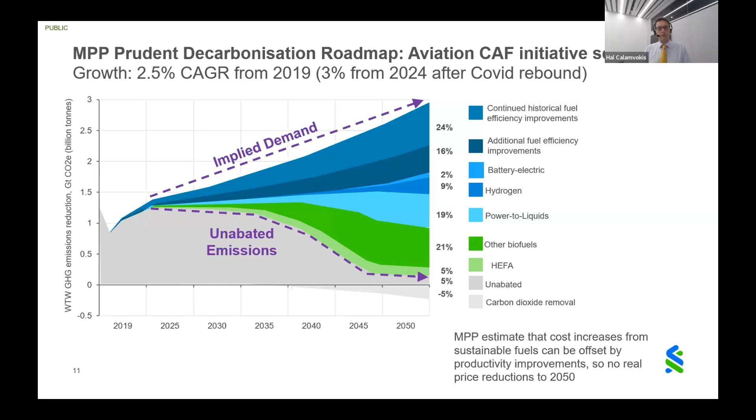And in terms of how this is used to come up with a metric for the Aviation Climate Aligned Finance Initiative, that very top line is implied demand, which is assuming an average of 3% growth from when we recover from COVID. This is lower than many publicly quoted numbers for the next 20 years, which are used in marketing. But bear in mind, this is in effect a constrained forecast. We are being constrained by the cost of and availability of carbon. And at the very bottom, you've got the unabated emissions, and you divide the two together to get an emissions intensity metric.

But just stepping back, I told you that was the roadmap selected by the Aviation CAF. There were actually 8 that were looked at in significant detail, and then 3 that were down-selected to, and I'll just talk through what the other 2 were. The red line here was a scenario for aviation from an organization called the One Earth Climate Model. And the blue line is the International Energy Agency, their net zero line, the NZE. These 2 are what are called integrated assessment models, in that they look at the entire global economy and all the segments of humankind's impact on the environment, and they apportion between them. Whereas the Mission Possible Partnership scenario is a bottom-up one. It's being built by the sector of what do we think we can do.

As you can see, they're very different. So within the One Earth Climate Model, they assume very strong growth this decade, and then a very fast switch over to sustainable aviation fuels. So emissions go up very quickly, and they go down very quickly. The IEA NZE assumes demand is effectively rationed to start with. Business travel and flights over 6 hours are restricted to 2019 levels. But that then means in later years, in the 2040s, a higher percentage of fossil fuels remain in the fuel mix. The areas under the curves are about the same. It's all about 20 gigatons of CO2 emitted.

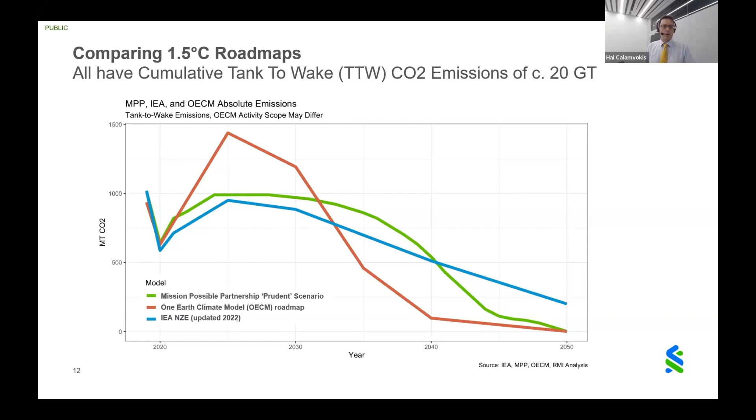And again, dependent on your business model, you might start closer or further away from the line. So when setting your 2030 target, if you were further away because you specialized in older aircraft, you can say, I still need to improve by 2030 and get closer to the line, but I don't need to be as close to the line as someone whose portfolio only has new aircraft in it, for example.

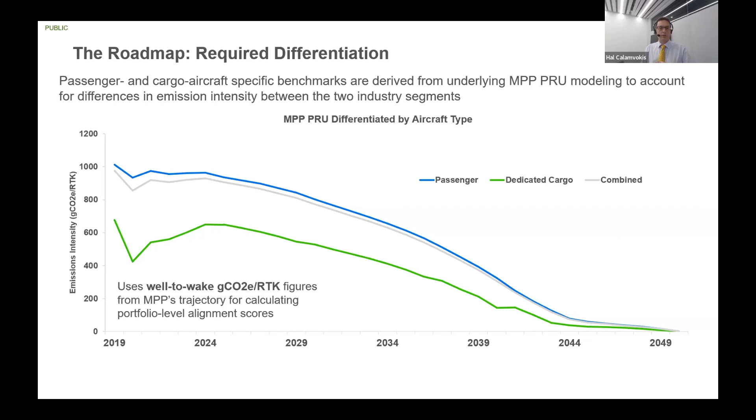And just making clear, I've talked about well-to-wake and looking at the life cycle emissions. There's what's called the tank-to-wake emissions from burning a ton of kerosene in a jet engine, which generates 3.16 tons of CO2. ICAO is the designated competent body under the Paris Climate Agreement, and they just periodically work out what they consider the global average to be. When you include the emissions related to creating the fuel, that's 3.84. And again, this is the ICAO approved number.

And when talking about SAF, I think you've probably all often seen, oh, well, the emissions are 80% less. That's actually relative to the 3.84 number, not the 3.16, because most of the emissions relating to producing a sustainable aviation fuel actually are happening on the ground in making it. So comparing it to the 3.16 number doesn't really make sense. And another point here is that, if you've got very good eyesight, you'll see that this is CO2e, which is the equivalent that includes a factor for things like methane and the other 6 of the gases defined in the Kyoto Protocol.

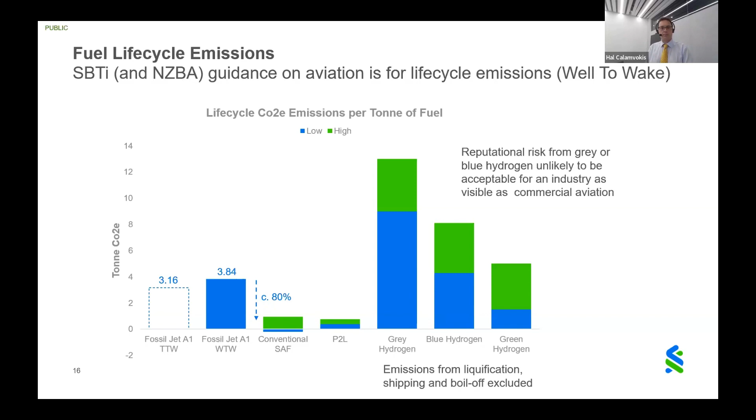And I'm now going to step into IATA's net zero roadmaps that were issued about a month or two ago, which there are 6 of. As an ISTAT appraiser, obviously the aircraft technology roadmap is the most interesting, but one has to look at the energy and new fuels one as well. And again, the operations and the other roadmaps are sort of beyond the scope of the Learning Lab today.

And to their credit, IATA have done a lot of work on this, and a lot of it is they're putting: if you want to do X by this year, you had to have already done Y 5 years beforehand. And even as summaries, they're very hard to read. So I'm just going to distill down a few of the most pertinent points.

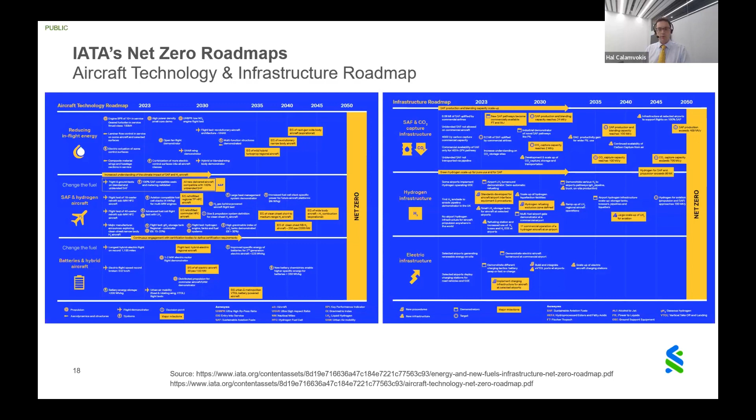So they've got two streams here on the aircraft technology one: reducing in-flight energy, just making every aircraft more efficient, or new aircraft more efficient. And then they have a change the fuel roadmap that I've added in some from the energy and new fuels. Those two key bits in the middle there, which is we need standards for the aircraft airport interface and what is and isn't approved equipment to pass liquid hydrogen from wherever it is on the ground to the aircraft.

And there's also a work stream which is titled hydrogen refueling exclusion zone defined. Now, hopefully they go, well, actually, we don't need an exclusion zone. But the people who determine safety of fuel handling on the ground have to work through a process. Normally, the outcome would be an ISO, an international standard, on how you do it safely. The boxes in red are all to do with sustainable aviation fuels, which again I won't go through as they've been in other learning labs.

And then I'll just point out, with even the sub boxes I've chosen, the work that's already underway or planned. So that flight test of an ultra high aspect ratio wing, that's a NASA X66A program. And then this mild hybrid turboprop is what ATR are proposing as the EVO.

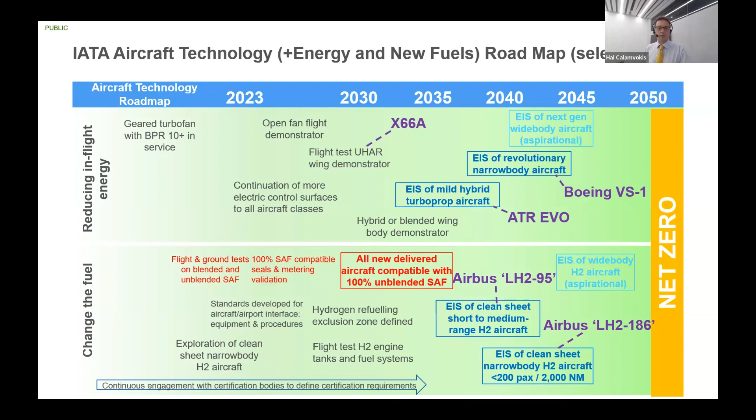And just going back to, if you remember, that middle wedge of the fan chart is you've got renewable electricity. How do you turn it into productive work? Now, aircraft that are 100% battery powered will always remain a small element just because of the weight of the batteries. And even if you assume the levels of battery technology improvement that are programmed, they still end up being quite small aircraft that are responsible for a very low proportion of the emissions today. Hybrid electric could actually deliver more decarbonization. We'll touch on that.

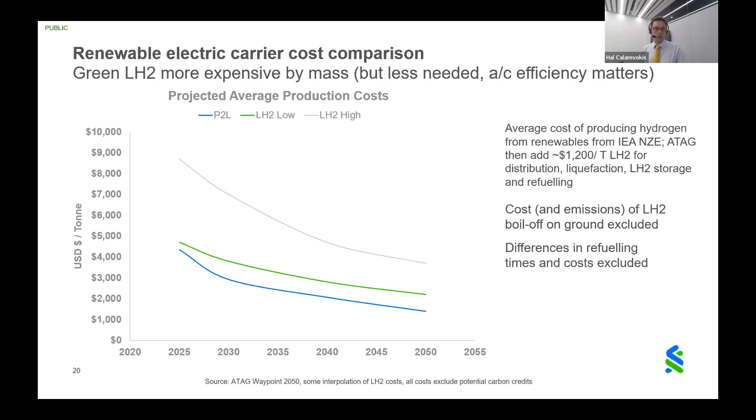But talking to the people in the fuel supply industry and who are developing sustainable aviation fuels today, several were of the opinion that ATAG's assumption on shipping costs for hydrogen was a bit low. And I think effectively ATAG are assuming an average, and that at many airports where liquid hydrogen is used, it's produced locally.

And the point here is there are lots of projections on the cost of fuels and the cost of electricity, but bear in mind, we end up paying the price, which may not be related to it. Simple example: if you look at, say, Abu Dhabi Airport, major oil producer, they make it round the corner. The cost of getting a ton of kerosene to the airport is probably between $50 and $100. Its price 2 weeks ago was $950 a ton.

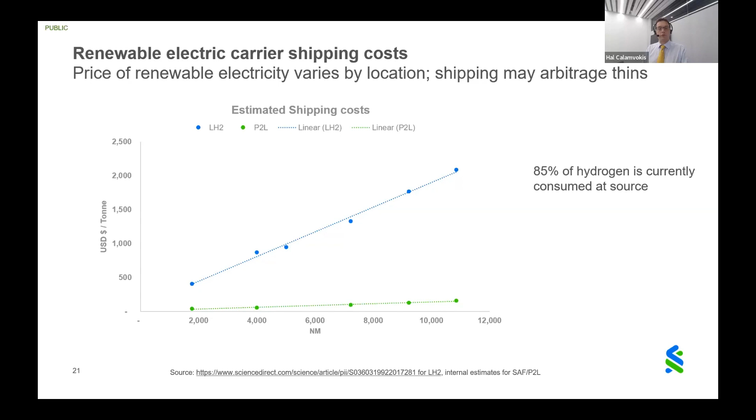And then stepping into the regional space, Airbus has been talking about a 95-seat aircraft, less than 1,000 nautical mile range, which is actually a turboprop. And they've been looking at 2 different ideas to achieve this. In one, the technology will be mature sooner, which is you still have a combustion engine and you burn the hydrogen, which could be available in 2035. But as you're burning the hydrogen, the key point is it's not zero emission. You still have some NOx.

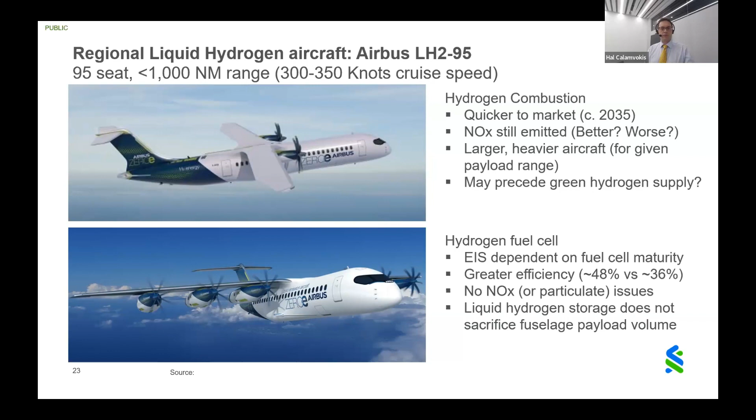do the second aircraft? And in terms of trying to look at what might be the potential demand and hence abatement potential for an aircraft of this size, I just looked at current 95-seat aircraft and said, how significant is this market? On the left is just data pulls from Cirium. One is from 10 years ago and one is today, of basically 70+ seat regional aircraft, which I've just taken as 4 or 5 abreast aircraft.

In some of these size categories, you'd have the smallest versions of the A320 and the 737, but most people selected those as an add-on to the larger aircraft, so they wouldn't really be natural things you'd replace with a 95-seater. In terms of the total in-service and on-order aircraft, the population has grown by about 20% in 10 years. That's good. But what seems to be happening is it's hollowing out. There's been growth in turboprops, and the turboprop number would be better. But at the moment, there are quite a lot of Dash 8 Q400s and a few ATR 72s in storage that might come back into the fleet soon.

The 70 to 89 bracket, apologies. These are all single class. Most of those are what would be called scope clause aircraft, i.e. they can be operated by the regional airlines in the US, even though normally the scope clause is 76 seats two class, and it has an MTOW limit as well. So they've grown. The middle size has actually shrunk a bit, and then there's been lots of growth in the bigger size, which is now the A220-300 and the E195-E2, which is actually a stretch of the original E195.

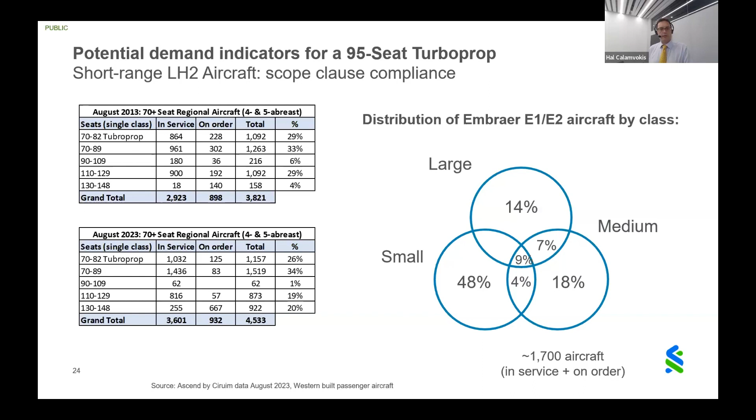So it's an interesting area. It's hard to understand how big an impact it would have. But then I think part of the question in terms of looking at green hydrogen pathways is, is it an important first step that has to be made?

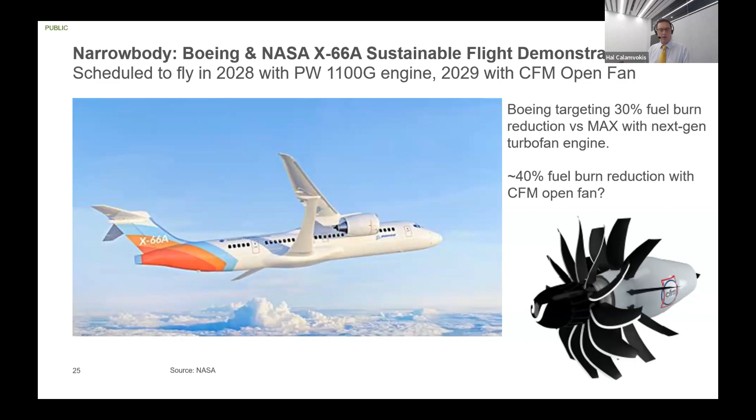Going on quickly into narrow bodies, this is the NASA X-66A, which they've agreed a program with Boeing on. The fuselage and tail come from an MD-90, which gets chopped up and moved around. The aim is in 2028 to fly it with a Pratt & Whitney GTF, and then a year later with CFM's open fan. When Boeing were first promoting the Sustainable Flight Demonstrator, they were talking about a 30% fuel burn reduction compared to the MAX. You'd expect that to be better with the open fan, but we'll watch this space.

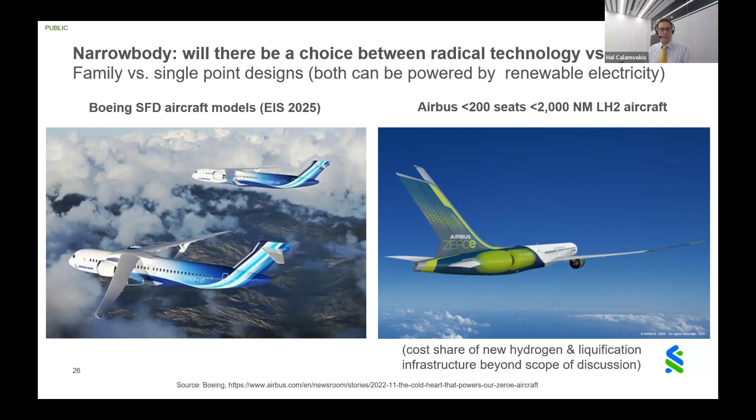And this links up to the picture on the left, which is Boeing's proposal for their new SFD. Sorry, there's a typo there. That's 2035, not 2025. Airbus has been talking in public about their hydrogen aircraft, less than 200 seats, less than 2,000 nautical miles. But the key point at the moment is that's a single point design. Boeing is talking about a family of aircraft. They've shown two, there could be three, where you're using the same cockpit, etc., systems to cover different sizes. And the importance of that I'll just show by looking at where emissions come from today in narrow bodies.

But if we roll forward to 2036, which could be an entry into service date, that's dropped closer to 45%. And you can actually see the increase in the number of large narrow body aircraft in the fleet and how they contribute to emissions. And also the small segment is largely being eaten out to the people who want a specific tool, be it a MAX 7, be it an A319. So a single point design, one wouldn't expect to have as great a market share.

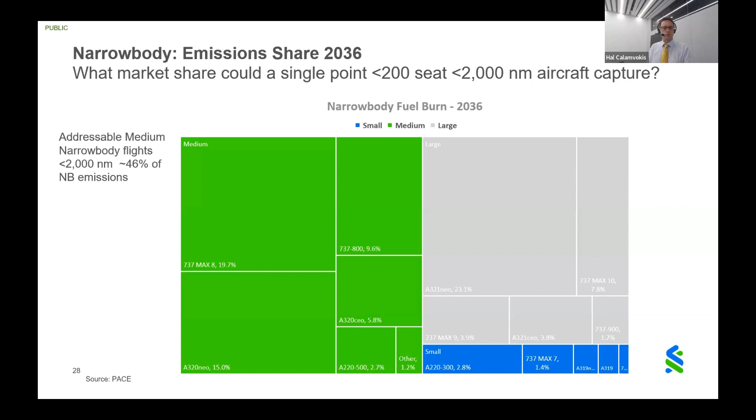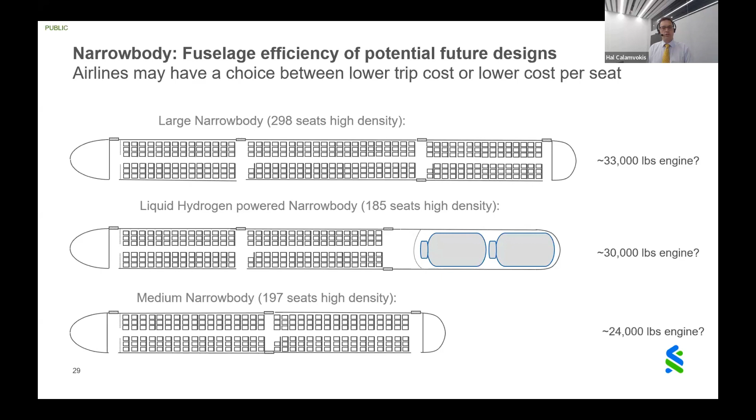And just concluding the presentation now to leave plenty of time for conversations, on the technology and fuel roadmaps. I haven't spoken about it, but the SAF part of the decarbonization puzzle is very important. It's also very important for current asset owners, because that's actually how we keep and extend the life of the aircraft being built today. The manufacturers are now talking about narrow-body replacement sometime in the middle of next decade, but it might be a bit later on. That shouldn't scare us, because by 2036, the Neo will have been in service for 20 years, which is as long as the NG was in service before its replacement came.